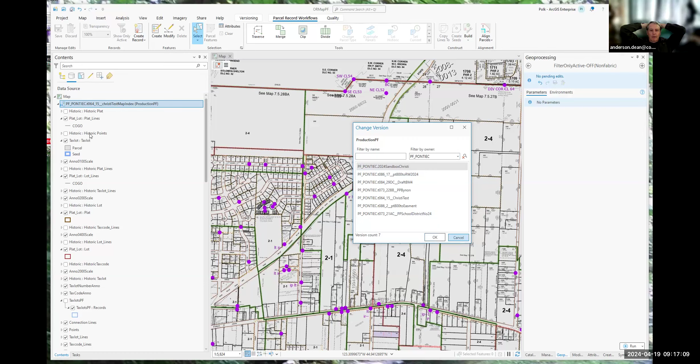So this is tracking, and the information we generate as part of this goes into a voucher process. We have a process that produces files that get directly imported in, and we like to tie everything together.

Would it be showing here where the ID number... no, it's probably the RA transaction ID. Oh that's right, everything's so new. We have this column here that's called RA transaction ID.

And we actually do, in our process of building our initial record, put in our transaction ID from our A&T system to help make that connection if we want to in the future. That's the primary key, I guess.

So do we do anything like that, Gabe, at this point? No, we don't. The deed number would be the closest thing we have to something like that. We do not have transaction IDs in Orion to tie in this way. We store the deed number in source.

So could that be an account number field, I wonder? No, the problem with account number is over the years you're going to do a lot with that account. So if you're trying to track back what that particular version is, you need to track it back to the source.

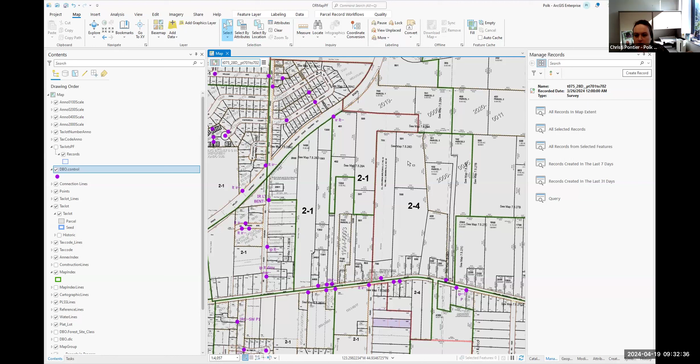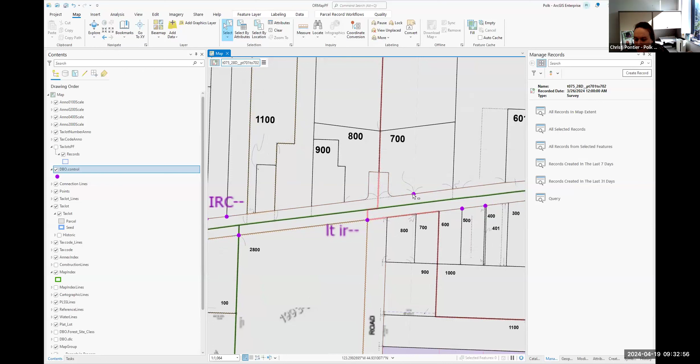Generally at this point we go straight into the traverse and start doing it. This particular one, my call to my place of beginning has a call from a DLC up here down to this point, which we also have control for. So we wouldn't normally in Polk County start with the ground to grid correction, but on this one I potentially would, because I have enough data up front.

Would you guys like to see that, or would you rather skip that step? I would like to see it. We would like to see it. Okay, Gabe wants to see everything. Yeah, I do. I like to see it, whether or not I'd ever use it.

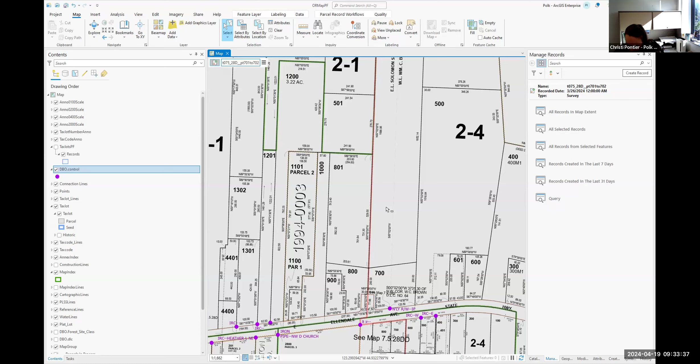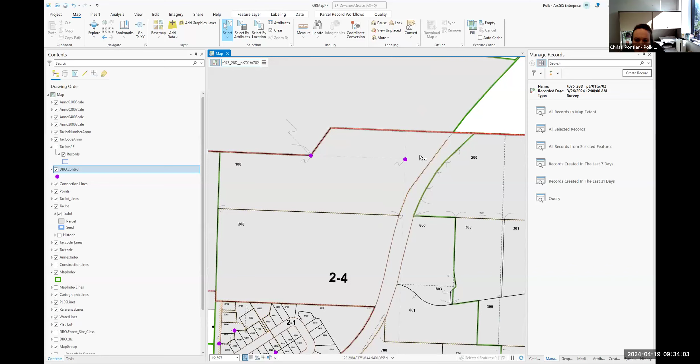So let me go ahead, I need to remember which piece it is. If I have multiple control, I want to make sure I grab the right one. Just give me a minute as I figure out if I need my Shelton or my Brown DLC.

But all of this, all the things she's going to do with Traverse and so forth, are just standard ArcPro tools. However, because she has the record activated, the line features she's going to add from now on with Traverse and the like are all going to be associated with this record. So Traverse is the same, taxlot lines is the same. All that Parcel Fabric is adding is that connection of what you're entering to the record.

That's it. One thing I'll add is in Polk County, this is a choice we made: we wanted our non-fabric feature classes to also track with the record. So one of the things I'm going to do is select my record and run a tool Dean's made called assign record ID on, which allows that whatever non-fabric layers I create will also get the record ID tied to it, so for our purposes it's all connected.

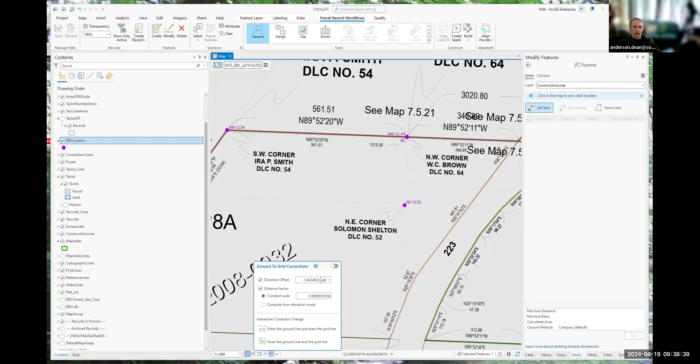I've always had it here by default, so I do think it's always default there. It's always there. Whoops, and I've lost it again. There we go, I'm going to have to re-enter it. It's okay, it's still there.

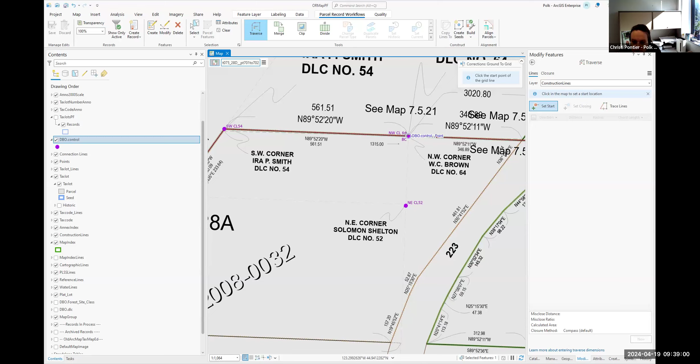So now I'm going to go ahead and hit next. It says click the start point of the grid line. My start point is actually going to be this right here. Don't mind me, we have multiple layers of control—I'm just going to click the one that I want it to be, which is that one. And then I'm going to go down to my other point.

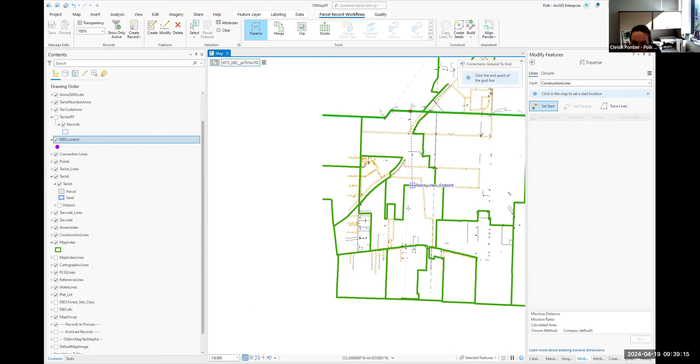I can never do this part right. Cool, good job Christy.

You can set your snapping to those controls. Before, I changed my snapping so that it will only do control and taxlot line, just to help avoid some extra things that may or may not go. So I'm going to go ahead and click this one.

And when I do that... how do I get it to pop up there, Dean? Do you remember? I don't remember. Okay, normally I can also see it up above, but this now shows my direction offset and my distance and my scaling that is set because of how I put those in.

So now when I COGO it, it should be all lined up without having to rotate later. And you typically do this with every transaction, every record. In Polk County, we rarely do it because I only feel comfortable doing it if I have the control to base it off of.

If you want it to just match with your map, yes, it's a great way to go. But that's per record is what I'm trying to get at. You can leave it turned on, but you probably want to reset it per record because every record usually has a slightly different rotation and scaling.

And just an FYI, I just checked our ORMAP, and yeah, when you click on parcel record workflows, that ground to grid tool is there.

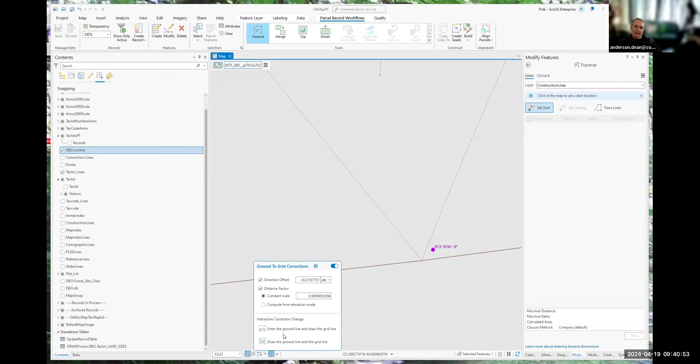Gabe, in the olden days, back in the ArcInfo days, Tom and I decided that we would have a ground to grid conversion in ArcInfo for every township. So no matter where you started, if it was a particular tile, basically a township map, it would automatically set the ground to grid. We did that for a good 10 plus years. Over time, the next cartographer said no, that's implying things that are not clear, and so we took it off.

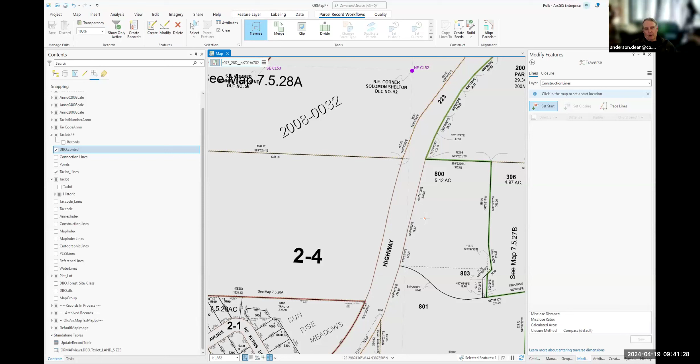Okay. So it's kind of fun to see that it's back, but actually into something that can be worked with. We just flat out set it.

And so at this point, basically my place of beginning, I know exactly where it's at. My call, I don't necessarily need it, but I can go ahead and build it. Like I say, you can build it into connection lines and then it's already part of your fabric. Again, it's just our choice of workflow - we're still using construction lines.

So then I'm just re-entering that stuff just to kind of show that it should match now that I did that ground to grid. If I had not done it, there would have been a rotation when I did this.

And if they had found their place of beginning, Christy, and were comfortable with that, they wouldn't have to do any of this. It could all just depend on your business process.

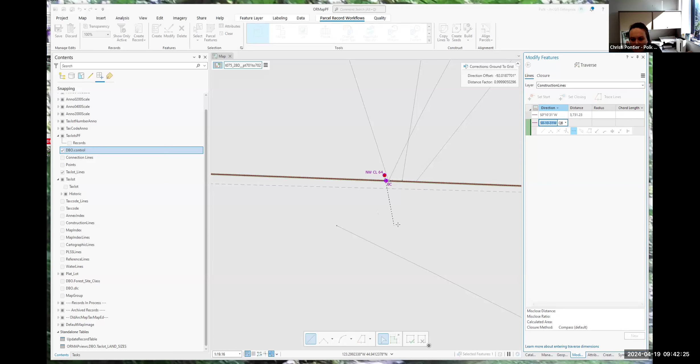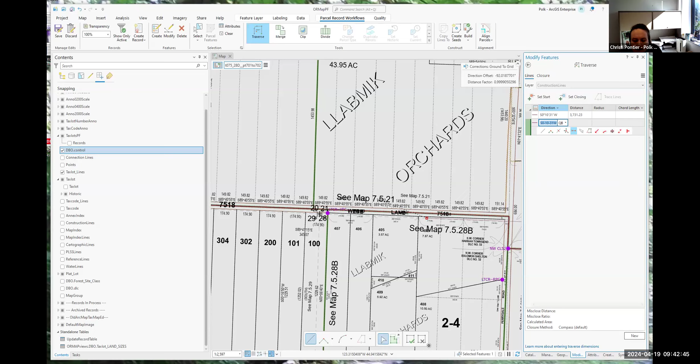And it's a little slow sometimes. Hopefully eventually get there. There we go. Did I type something in wrong? I can't even tell you what happened there - even what map I ended up on.

This is a standard ORMAP tool that you guys have. Yeah.

So somehow it must have clicked off. I'm not sure what happened, but we will reset our starting point.

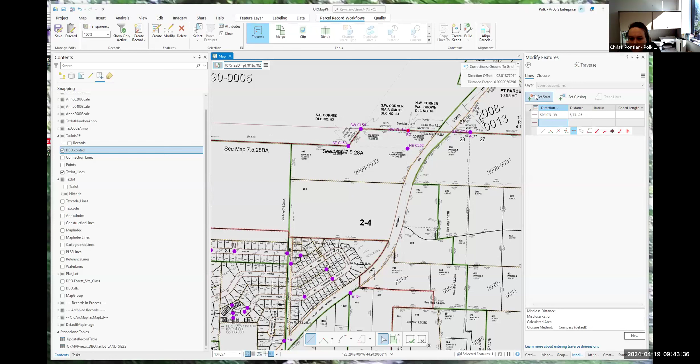Christy, all those purple points are control points. Is that correct? GPS control? Yeah, they're GPS control.

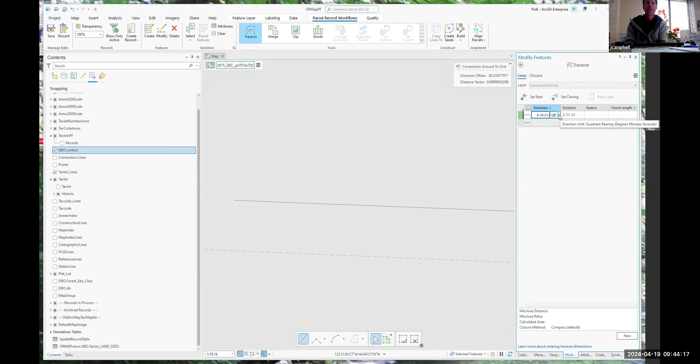Because yeah, I'm jealous, I don't have a fraction of that to work with. We don't everywhere. When I worked in GIS, that was part of my job, was to gather control to do the control mapping. Right, yeah, that sure would make things nice, having to go hunting it down and looking for things in order to tie into. You could do an ORMAP grant and you too could do what Christy did, which was get a GPS device and a shovel and go out and look for them.

I would love it, get outside a little bit. Yeah, I thought that was Chris's. Isn't that what Chris and Jason, what's his name, Jess do over in survey? Peter does our control right now.

Oh, our survey - actually, as part of our remapping, had ORMAP pay for a lot of that work. I'd love to get out of the office some more. It's great when it's nice out.

I'm not quite sure, but for some reason this number looks very off. I think somehow I got my ground to grid stuff off. And Christy, you could just turn that off and jump to Traverse. I think we got the idea.

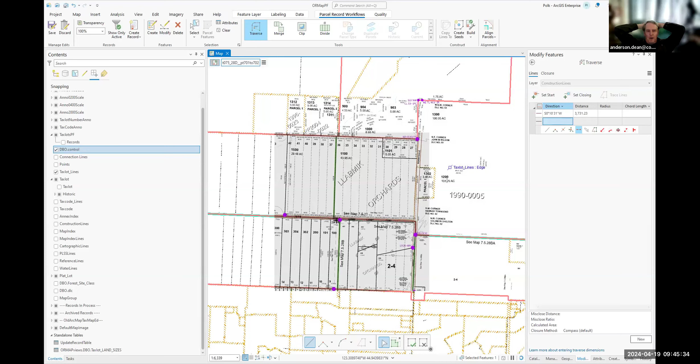Let's see here. Yeah, I'll go ahead and just turn it off so we won't see the rotation happen - we'll have to rotate later ourselves. I'm not sure why it had issues, why it was going so crazy - somehow the grid got way off, was sending you off to Never Never Land.

So as you can see, since I don't have ground to grid, it's not going to match up. It's going to rotate quite a ways off. I'm not sure I'm even going to go ahead and build this line, because in this case, I'd rather just start at my place of beginning.

But I could go ahead and finish by hitting this, or new, or even back, and it would create it. Instead, I think I'm just going to delete this. Don't worry about it.

Doing basic editing, but can you not just, when it's highlighted like that, just turn on edit vertices and fix it that way? Or is that not working, what you guys do?

We may do that when the line is finished. At that point it's going, but we probably wouldn't do it during the middle of a traverse.

And I do use that in the future, when we still prefer to do our editing with the lines instead of the polygons. So I do use edit vertices and insert, or intersect, and a lot of those tools at that stage.

So instead, I'm going to say this is my place of beginning, which I need to make sure I got the control. Now, are you in construction lines, Christy? I am still in construction lines. I will want to change this to our tax lot lines.

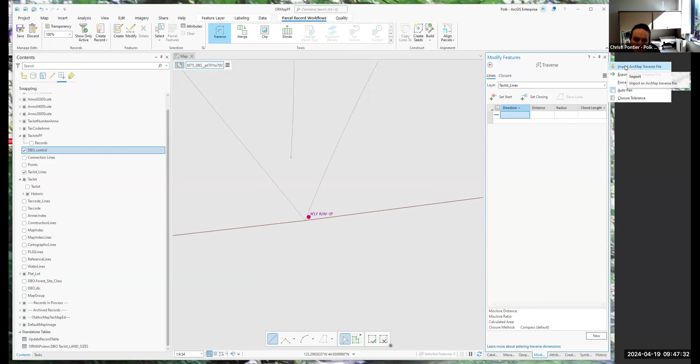And to save time, unless you really want to see me battle with the traverse, because I do tend to make a lot more mistakes on presentations than on my own, I saved an export of the traverse, so I can go ahead and import the file. Go ahead and do that.

So yeah, if you get stopped in the middle, or if you have one that for some reason isn't clean and you think, I'm going to take a 10 minute break and come back to it, you can save it and come back to it. Just like in ArcMap, or if you have ones from ArcMap, you can pull them in.

Oh, that's interesting. Yeah, so here's my traverse stuff. So you can see I have a curve here.

Curves, we put in the bearing. The chord length is our choice. If you do arc length, that's here, that's a choice, and you can set these up by default. And there's the radius. If it would have been a left instead of a right turn, you would have done a negative 15 instead of a positive 15.

But that way, and again, since I don't have the ground to grid, you can see the rotation is off. But it does show, if it's over a 1 to 100,000 ratio, it'll just show high accuracy. It shows the misclosed distance.

You can sometimes see a little more accuracy if you go over to the closure tab. You also can change it from compass to other types from here. And here it will show your residual values, your adjusted, so you can see all those pieces that you kind of saw before in

ArcMap, if you're interested in seeing it. You also can set your tolerance if you want something different for the front. So like right now, ESRI has it set for 1 foot. You can actually play with this and change it if you want.

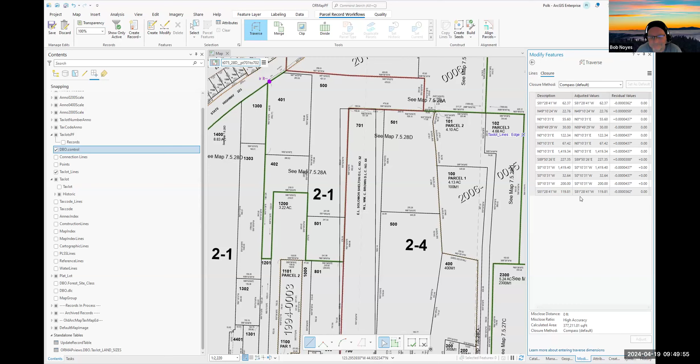We haven't changed our base GIS coordinates and all that. I figure we're waiting for DOR to make that change, correct Dean? Yeah, and we've done that twice now in the last 25 years, going through all the databases everywhere and all the historical data to make sure we don't lose anything. Oh yeah, I'm so glad that the next time they do that, I'll be at the beach.

Yeah, absolutely. Sorry. Christy, did you click on the hamburger before to pop that?

Sorry, oh, to get to closure tolerance, I clicked on the hamburger menu. But if you want to see more detail, you actually click on the closure tab.

And it's also where you go to export or import a traverse file. And if you had a really bad closure but still wanted to force it, this is also where you could say to force the closure.

That's how we do things in Josephine County, just force it. When all else fails, just force it, just hit it harder with a hammer, it'll be fine.

So at this point, I have my perimeter. If we want to make things easier, I know some counties for their initial build used to build off the county and then just place it later. I don't know your guys' way of doing things, but if you want to get rid of some of the busyness, you can hit show only active.

That's going to get rid of all of your fabric features other than what's in your record. We built a special tool since we track the non-fabric stuff to the record, so I can also filter only active for non-fabric and really just clean it up. So all I'm seeing is my stuff, and I can see control because it's not something Dean knew to filter, because he doesn't have it in his map. I added it on my own.

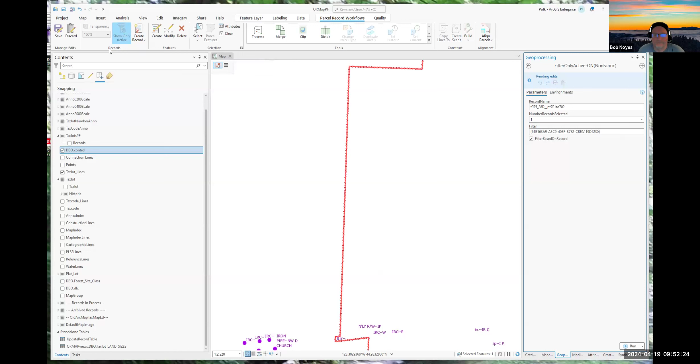Oh yeah, it's on our ORMAP right now, it's grayed out, but I assume once we get Parcel Fabric in there it'll show up. Well, it's grayed out whenever you don't have an active record. If I turn this off, now it's grayed out and you can see everything.

But because I had it on when I changed that, it's still on and it went right back to it. So that COGO was the boundaries based on the bearing and distance of this survey we loaded, correct? Yeah, that's the base. This is the one where I did not have the ground to grid, because for some reason I got that messed up.

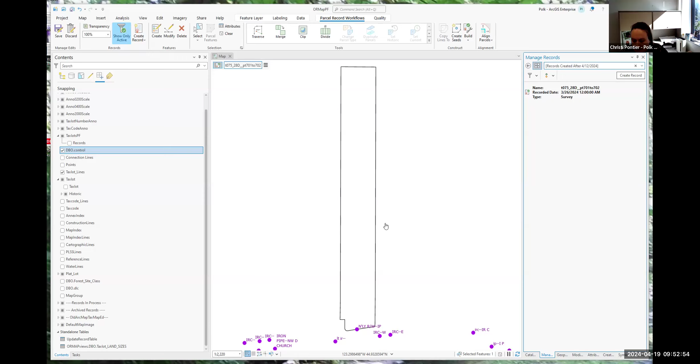Like I say, it's not something we generally use, but it can be a useful tool, and I had it set earlier when I was testing, no problem. I'm not sure what I did wrong, but I don't use it a lot.

So if you didn't use the ground to grid, you would just start from the point of beginning, which you assume is a good point, and COGO from that point. However you guys' workflow works, if you base it off your map and it says start at the northwest corner of that tax lot, great, start there.

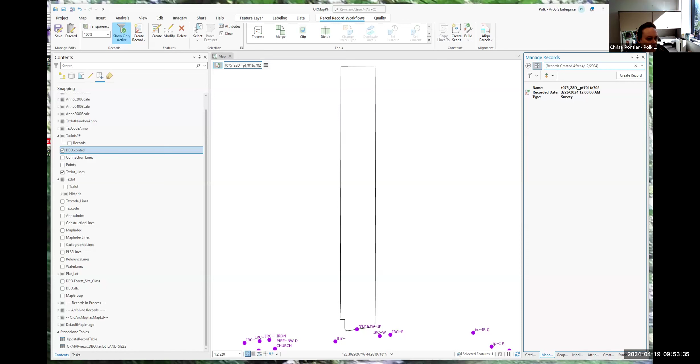Okay, at this point we would then do our interior lines. Assume it's probably similar for you guys too. I'm going to go back to the traverse tool, still set to tax lot lines. I'm going to go ahead and set it.

My start point. I also traditionally used to not worry about when I set a closing point. Now I like to, before I start the traverse, because if things are close, it can actually snap to the end of what you are COGOing instead of what's already been COGOed, where in ArcMap that wasn't true.

So how did you always know where your start and end were? I use snapping. For what though? Like how would you know, based on the tax lot lines, because I had COGOed those earlier, that you did the perimeter. Now I'm working on interior lines.

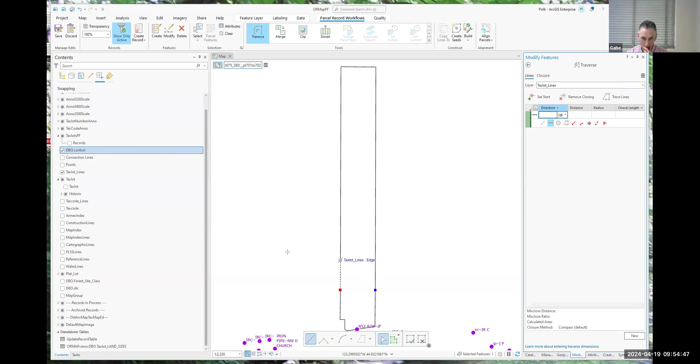So I only have a few places where it breaks, so it's fairly easy to find them, because you don't have the original break, so to speak. I'm following. When she traversed it in, she made individual lines, not COGOing the entire distance. And then her snapping is both to vertices and to endpoints.

And so as you're sliding along, it tells you what it's going to snap to. In an instance this simple, why would you not just draw the line? Why would you traverse it in? Just asking. We always do in Polk County, we try to keep track of everything.

So does that, by doing the COGO, does that put the attributes on the line? The attributes will be, yes.

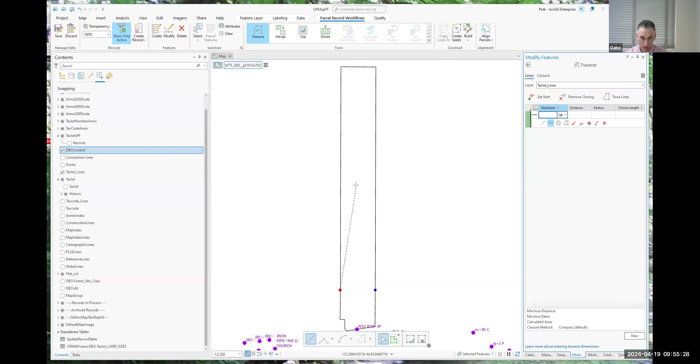So if you just drew it, those attributes wouldn't be on there? Yeah, it wouldn't know unless you entered them in. Okay, so you could draw it and then use the tool to calc, update the COGO attribute.

The problem is when you do it that way, it's going to be its best shot at an inverse, and that may not be there. So it's faster—we've decided it's faster to COGO it in, plus you check and make sure the surveyor is correct, because often they're not.

This way we can make sure—our surveyor often doesn't look at the whole document to make sure it meets spec. But if the bearing and distance on the doc is just slightly off because the folks used AutoCAD and then inversed, and it's not exact, this way we find it.

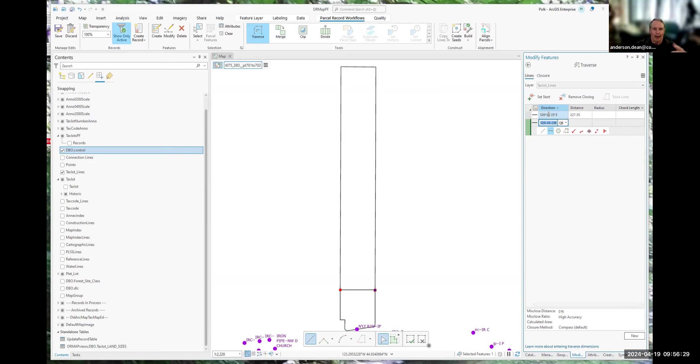Because all you need is that not matching the record when someone's complaining about their taxes, and then you have to explain why it's off, and then they think you're a liar. It's hard to explain when your direction is off by a tiny amount, but if they're angry, this avoids that issue.

We just make sure it matches. But you're right, you can snap point to point, fill it in off the map and quickly double check to make sure it matches. We've just found for us, we're less likely to make mistakes this way and we know better what's going on, which is probably better—but that's why our processes aren't always the best.

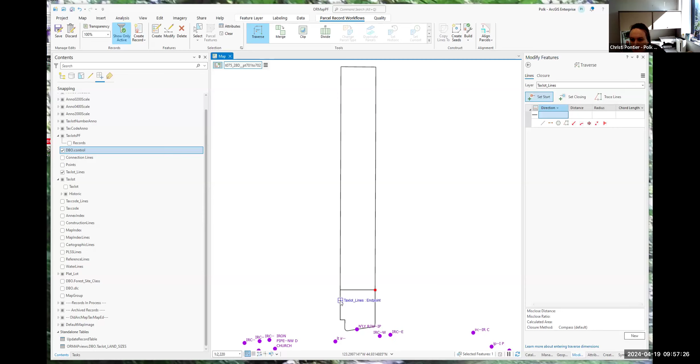Like right here, this one I cogoed in, I could see my closure was pretty good. But if I wanted to, I could set my start point for this one, and then I could set my closing, and I could just decide to draw it in—I think like that.

And it puts it in, and as you can see, it puts the little brackets on it that show this is a computer-calculated amount. But it would allow me to look at it and I could go, oh yeah, that's not right, I want this to be...

229.99, and this one is supposed to be 8128. This one's supposed to be 41 instead of 39. So yeah, I could manually update it like this.

Oh, but that's a great idea, I hadn't thought about that. That's way better than the attribute update—there are different ways that you can do it. And this way I still get to see, okay, I have a 0.01 accuracy on it.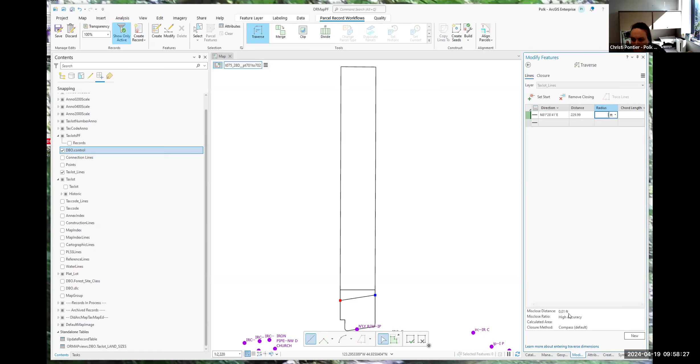But if you had just done the traverse, it would have given you the same thing. Yes, the end result of these two efforts is exactly the same? Yeah, same steps, there's no difference.

So then those are now drawn in, and what we typed in is what's going to get stored on the attribute for that line. So now, since I have my show-only-active turned on, if I open my tax lot lines table...

It's only going to show me the tax lot lines related to this record—that's all that's even here. So it's very quick and easy to see what's actually in for the direction. In this case, the arc length, because that was the curve or the distance, and that's what it records.

And that's because we're still in show-only-active mode—that's why we only see these lines, correct? Yes, if I unclick that, then you get everything, then all of a sudden instead of 14, I have over 2,000. Yeah, okay, gotcha.

I will warn you, if you leave this table open, sometimes you see weird things happen with the map when you're trying to run things. So we generally try not to leave tables open, but they are useful. Let me see.

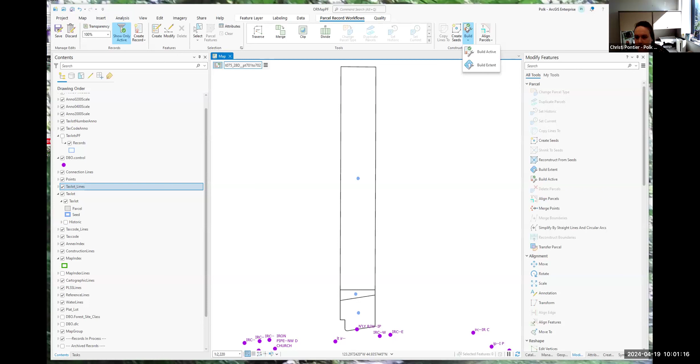It looks like if you're in show only active mode, then you get both. If you don't have show only active, then you get the build extent. You can always choose whichever one. With build extent, you'd have a hard time, I don't think it would really work without turning off show only active, because then all you're seeing is your active.

You would not want to use build extent without this rotated, because then you're going to end up with all these sliver polygons due to the rotation. So just a heads up - depending on which route you pick, there's always things to be aware of.

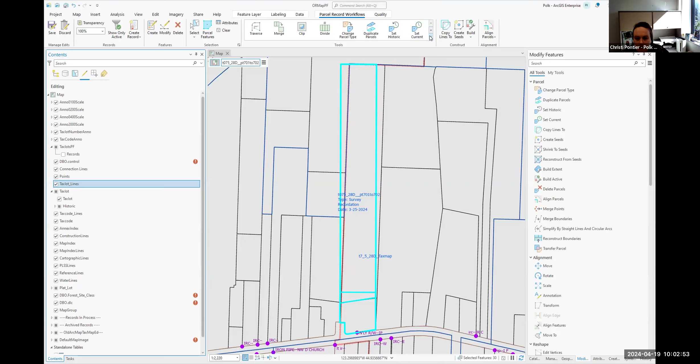The next thing I'm going to do is rotate. So I go to the parcel record workflows.

Where did you click for select all records? In the hamburger menu, right here - select records is here, and further up is select all features in active record. I clicked the 'all' option because I want it all. If there were connection lines created, it gets them - points, lines, polygons - assuming you have all your layers in your map editable, selectable, and on display.

So then, under the parcel record workflows tab, I clicked the rotate tool, and it comes up here - there's other ways to get there as well. I'm going to hold down control so I can move my center of rotation. Right now it says it's snapping to taxlot lines.

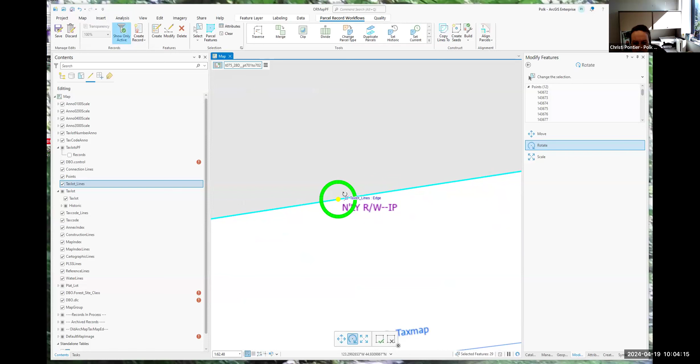I'm hoping to make sure I get it on - it must be on my control, that's why I can't see it. So I made sure I put it on the point I wanted. I'm going to turn the show active back off.

Now I'm going to rotate it to my map. Since I have snapping turned on for taxlot lines, I can just click with the mouse and grab this to rotate and snap to my map.

Like everything else, play with it - make sure you know how things work and what you need on or off. That rotate tool has shortcuts, when it works, because I remember which button to hit. It's amazing, but when you forget which button to use, it's sure annoying.

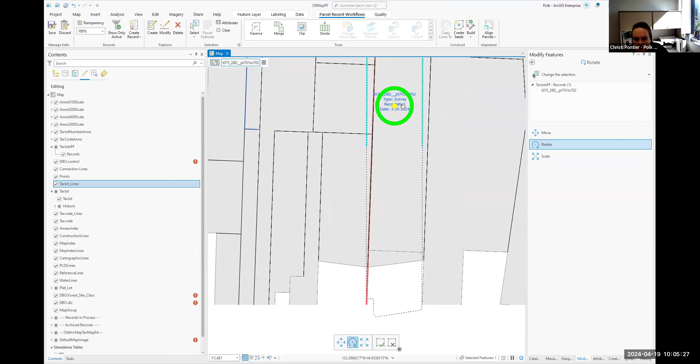So when you feel you have it rotated to the right place, you can just click this finish button and it will move everything. It looks like it did not move my record, which means I probably don't have - yep, I did not make my record editable, so it did not move with it. Now if I clear, select record, rotate, I'll have to move my record separately because I didn't check to make sure it was editable at the time.

So is it going to true north? Why is it going to true north and not your magnetic declination up there in the Portland area? Because we didn't turn on the ground to grid.

Oh okay, yeah, if I had set that up correctly, which was my plan for this, it would have been different. So when the surveyor record or whatever you're using was done to true north, is that essentially what's happening here? Yeah, it had enough information to do the ground to grid. And that doesn't happen very often.

Well, there's a rumor we had a surveyor down here that liked to drink in the morning. So back in the day, back in the old days, I had done a project down in Benton County, and for whatever reason, a surveyor for 40 years always entered the north-south incorrectly, but the east-west was always good. Good historical record because he did a lot of stuff, but you had to be aware.

So where are you at, Christy? One of the things we'll do usually at this point is update our tax lot numbers. There are several ways you can do it. When there's so few, a lot of times I just select them and work through the attribute table in this new attribute pane. If you right click on the main title of the grouping, you can say select only these, and it only selects the tax lots.

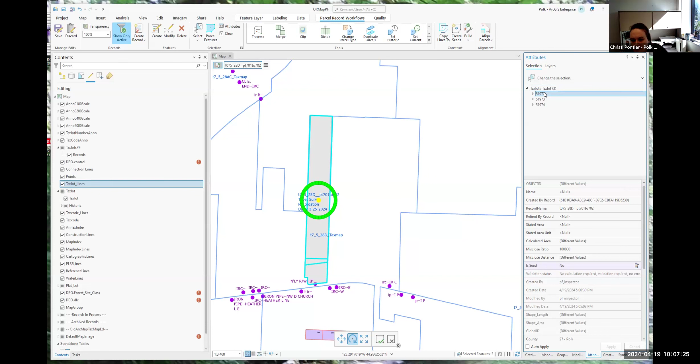Then I can easily just go through and say, okay, select this, and I know that one needs to be 702. We actually use the tax lot field to keep track of this for ORMAP purposes. ESRI usually defaults to name to do this stuff, and I can type things in. The other thing you could do, like on a subdivision, is they have a sequential numbering tool.

If you bring this up, you can choose your layer, in which case right now I'm on tax lot. You can choose your field. I would be filling out tax lot. Find it. Oh, I'm gonna be close. There it is.

Format number. So like if it was a parcel, you could put in parcel space, if that's how you did your lots, things like that. Or if you have a tax lot number that has something like county name first, you could put it in there. Start value, in our case, this would be like 700, increment by 1, and then you could click on the map and do it.

Unfortunately, I have 700, then it's going to be 702, then 701, so I wouldn't use this tool. But if I had, it would go here. I can just double click when I'm done, and it numbers them all. And when it's done running, it usually shows what the next start value would be. In this case, I would expect to see 703 because it's already run the first 3, and then I know I could start again if I wanted to and keep going with that.

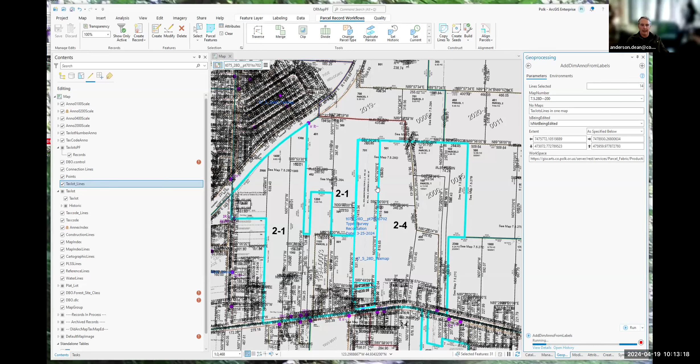It meets your labeling specification, but it may not meet Polk County's labeling specification. So Christy and Zach went through and they created labels with the correct size, the correct spacing, and all that good stuff to annotate. So that may be something we look at a little bit more.

And so if we want to see the ones that were created, I can go ahead and turn show only active back on.

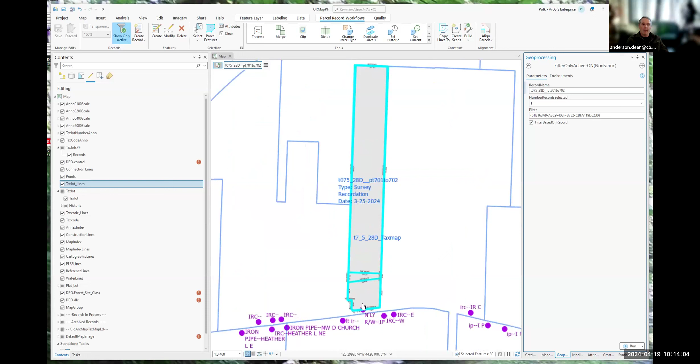Oh, that's nice, yeah. So again, this is that tool that, because she had the tool on that assigned it to the record, it did it. And so that's why you're not seeing the other stuff, but you're seeing this annotation.

It just seems a little cleaner to work with. It has some downsides, but you get yeah.

And so, yeah, so then I have annotation that I can then move and play with. I have different options. There's also a tool.

They also have the add taxlot anno from labels, and I don't know if they have actually have that as an ORMAP tool, but I'm probably not going to use it for something like this anyway.

I find it very useful for subdivisions. For something simple like this, if I turn my filter only active back off, you would see I already have tax lot numbers for 701 and 700 in the map.

A lot of times I prefer to just grab them and assign them to my record instead of creating new and having to delete out the old.

And then I only have to create annotation for 702. There's different ways to do it. But if I go ahead and turn this tool back off, we'll see.

And if you don't assign your non-fabric features to the record, it won't matter anyway, because I already have a 701 here, I already have a 700. So all I need to do is create the 702.

So a lot of times it's just easier to go to the create window. I am in 200 scale. It's fine, number. I have everything turned on. I apologize, I could have turned some of these off.

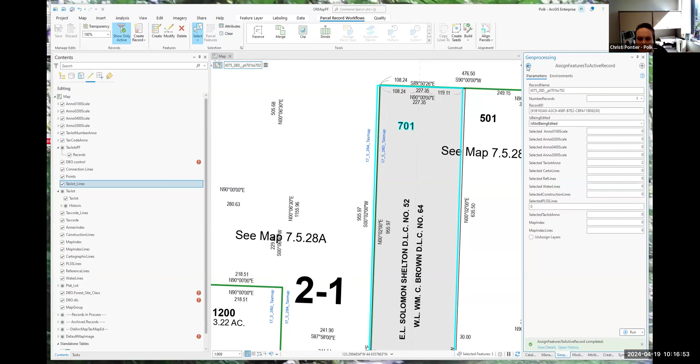Were we seeing right there that the rotation was off? That's the record. When I rotated it to match later, I didn't get it quite on. Yeah, her record is not quite rotated correctly.

Darn, you noticed. Well, yeah, that's because normally in our process, a lot of times after we build the lines, before we create polygons, we will do all our rotations, because that way when we do create, everything will be perfect.

We don't have to worry about if we missed a point or the record wasn't selected. And it rotates each point to where it's supposed to be, typically.

So what we normally do is, after we finish all our traverse so we just have lines, we try to place things the best we could at that point. That way, before we create annotation, polygons, points, or even a geometric piece for the record, it's already rotated.

So Gabe, I have to say one thing I'm annoyed at with how the hamburger works with Parcel Fabric is that you have to always explicitly select the record and explicitly select all features with the record. For the select to work, all of them have to be turned on, selectable, and editable if you're going to move them. Sometimes you forget to have the record done and then it's not in the right place and you have to go fix that. I don't know why when you say select all features it doesn't deal with that better, but I get caught by that.

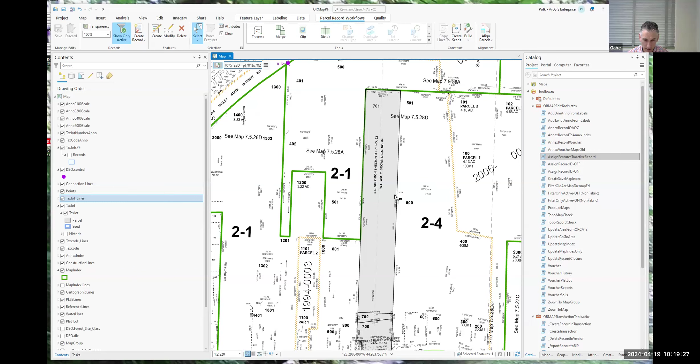Okay, another thing I have a question about is some of this annotation, like we wouldn't put on our map because it's very down, especially down by that curve. Can you select them and just delete them and not have it display, or do you always keep it there? Oh, you can delete them.

It's just annotation. In fact, we usually do like this curve data, we normally don't keep it unless there's plenty of room. So you just go up here and you can hit delete and the annotation's gone.

So the tool is converting the labels, and the request I had from Donna and Christi was to move as much of that information into annotation and then allow folks to move and delete stuff. The tool tries to, and that comes from the label. So you can play with all that up front, decide what labels you want to bring across, and then it moves it in.

Yeah, it's better that way than having to actually type them all in.

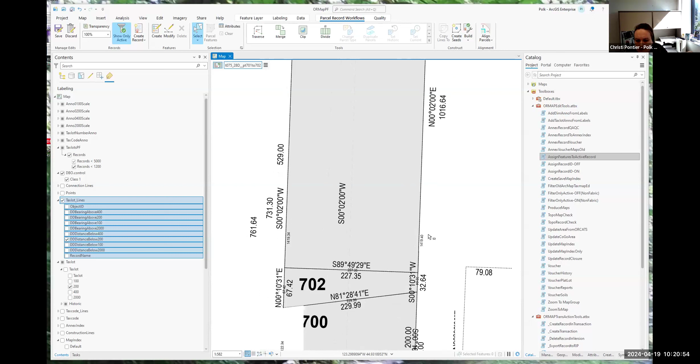Depending on how you have it set up, you can choose — when I have tax lot line labels on, I might only want to show distance for whichever scale you're on. In this case I'm at 200, so if I want distance you can decide above or below, that kind of thing. I could just turn on the 200 distance, it wouldn't even turn on the bearing. You can see there's a distance right there that they put on. It will just create it that way instead of having to create all the pieces.

Like say at Polk County we keep a lot of annotation, that's not common for most counties. The cool stuff is that the tool is just grabbing whatever's in the label for that particular label that you currently have turned on.

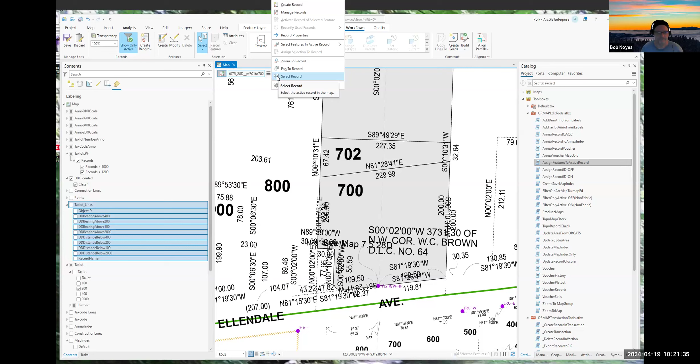Yeah, we can talk about that offline. I hate to say it, but I've got to make like a horse droppings and hit the trail. So, Christi, thanks for showing everybody this, and I'll check in with you guys, Gabe, and see how it all went. Okay, thanks.

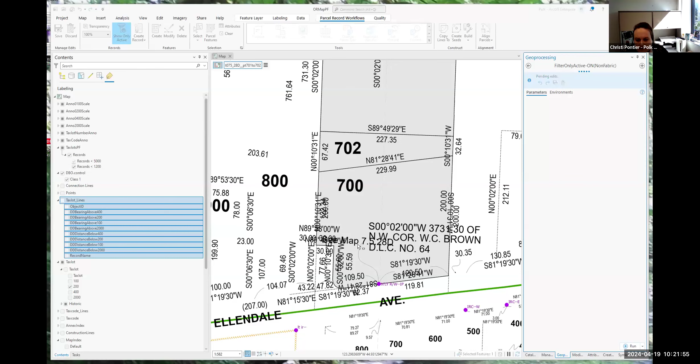So then I'm going to go ahead and kind of clean things up a little bit, work with just my record stuff again. I'll go ahead and get rid of some of this other annotation, because generally we would place things ahead of time like this, and then deal with the stuff that was already on the map. Sometimes I try to pre-look at the map and delete off things before I even create the annotation. It really just depends on what we're doing and what we need.

But it's easy. It's easy to grab and use the move tool and move things as needed.

In this case, where that bearing for some reason got flipped, I can select the one it goes with and steal the angle. And then when I click on it, just replace that. And now it's where I want it to be.

That I was just — cool. Yeah.

And then grab the right piece, move it where I want, continue that way. Like say, you can always delete things if you just want to select — they don't have enough room for this bearing, you decide you can just delete it. So different ways to kind of move around annotation.

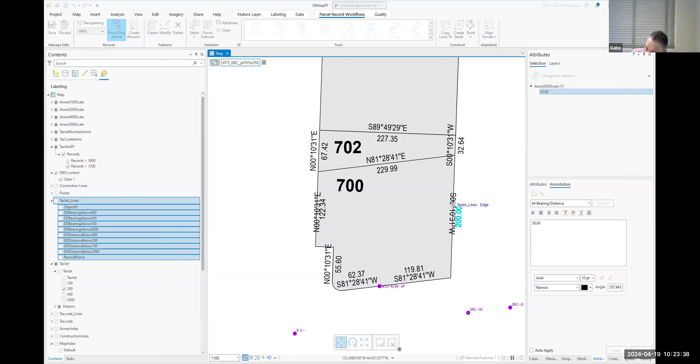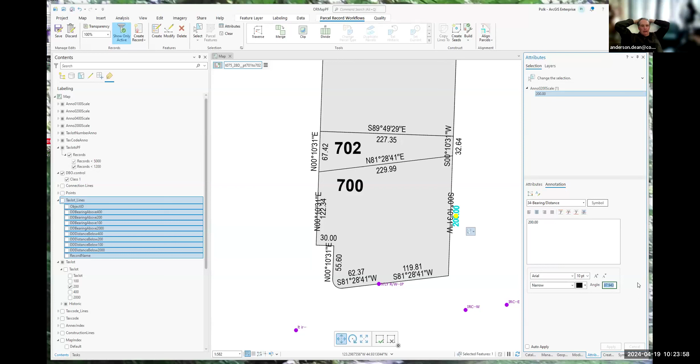I don't know how much time you want me to spend on this, but yeah, there's all of those things. Annotation is a big headache for Jeff and I. Annotation's always been my least favorite, even back in my GIS days. But you're using the annotation attributes as your primary tool for manipulating the characteristics of an annotation.

I just find this is usually the route I go to get to things. There's so many different ways to do things, you just have to find what works best for you. Might have to turn the snapping off. Hold on. But anyway, I don't know how much time you want me to spend on that, but we can manipulate it.

I can interject real quick. The only problem I have with manually moving all this anno is I like to have everything offset evenly. Otherwise, over time, you're going to have all these numbers, bearings, and distances at variable distances from the line. And to me, that kind of potentially could start looking sloppy, but I don't disagree with you.

This has always been Polk County's process. When I was at Marion, that's how we did it too. We did the follow feature and had the set offset, and that's how we worked. Yeah, and I'm all about that. It's hard for me to get away from that tool because I've used it so long and it's so clean. So yeah, I can't deny that.

This is, like I say, Polk County, how we've always done it, for multiple reasons, partly also because we do so much stacking of annotation. When I go and turn this back off and we have that old annotation underneath, we try to keep our historic annotation as much as we can too. So if this used to be 120 instead of 119.81, we'll put parentheses around it and stack it up above it. So everything has always stayed manual here instead of having that uniform feel.

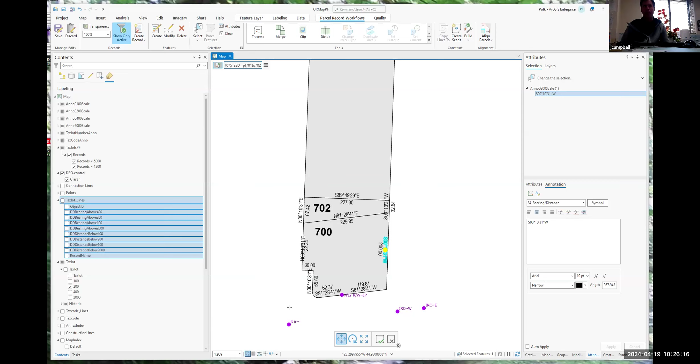We just gotta change our ways, trial by fire. Well, or find things that do work. There's a lot of things that I've had to find new ways to do what I used to do, and it just comes with lots of time and playing.

I feel like one of the best examples of that is how we actually put this record into our map. Which, let me just scan, make sure I'm not missing anything. So while she's doing that, I will see the Marion County guys next week, and I can talk to them about potentially doing an annotation demo and recording it.

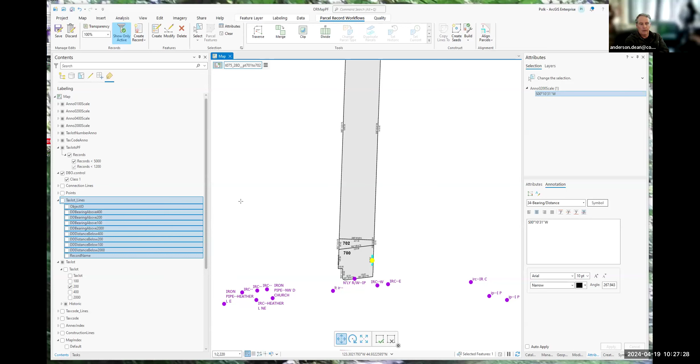So let's keep pursuing that. Christi, if that's what the guys at Marion do, let's see how they do it, because they're using Pro also. And do you know, I assume they're also in the Fabric, probably. I will find all that out next week. Tom Rohlfing, the assessor, and one of the guys is going to be up at the GIS forum presenting, so we'll find out how far they really are.

Switch back over. And I know they also have a more normal amount of annotation. They just keep distances, they don't worry about the bearing, a lot more of that too. So it's probably a lot more similar to what you're used to seeing.

And I also know that Marion County, at least when I was there, was very polygon based for their editing. Here, like I say, we're very line based. And so how we generally will work things in the map is more line based than polygon based. And that was my plan of what to show you as far as working it in, which would be the next thing I would probably focus on. If you guys are ready for that, or if you have more questions, or if you want to see more annotation, we can play with it, but it's more of the same.

Yeah, we are line based too, I think. We create our polygons out of lines, and the annotation thing as a whole, this was good introduction for us for this piece, I think. And there are tools for making arrows and everything too, can look at those if you want, just let me know. But I wanted to make sure to show you what I've found as far as trying to get back to more of a line base build in Fabric.

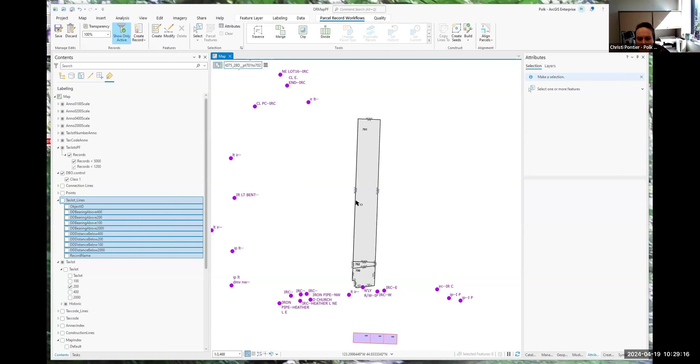So one of the things when I get to this step, I do it because I find issues with having the old lines and the new lines and the old polygons and the new polygons. As long as you're in at least 3.1, Dean, when they did reconstruct from seeds, you're able to take... I'm going to just select all the polygons.

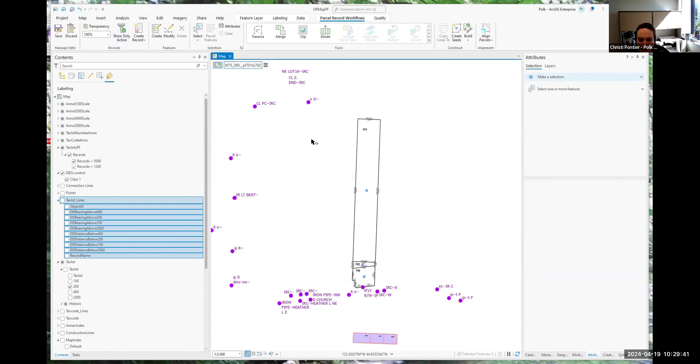Make sure that's what I have selected. I'm going to run what's called shrink to seeds on my new, so this is because I still have show only active, my new tax lots, I'm shrinking back to seeds. I'm now going to go back to show all of the tax lots.

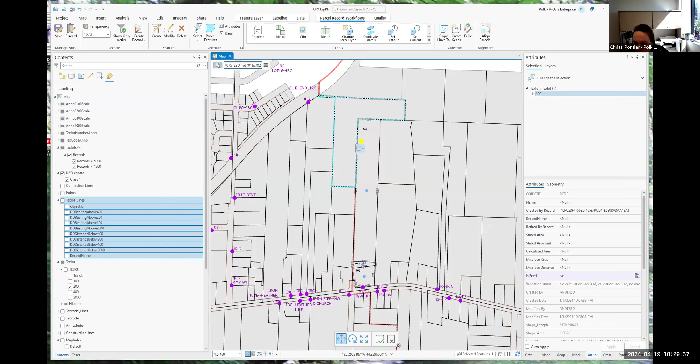My next step would be to select all the adjacent tax lots. So I'm holding shift to select a whole bunch. I still have the move tool on, apologies for that, let's turn that off. Back to just select. So I'm going to hold my shift key and select all the adjacent tax lots.

I'm going to go ahead and also shrink those to seed. But this is a really cool way to do it. So I'm just teasing Christi. And the order matters on this.

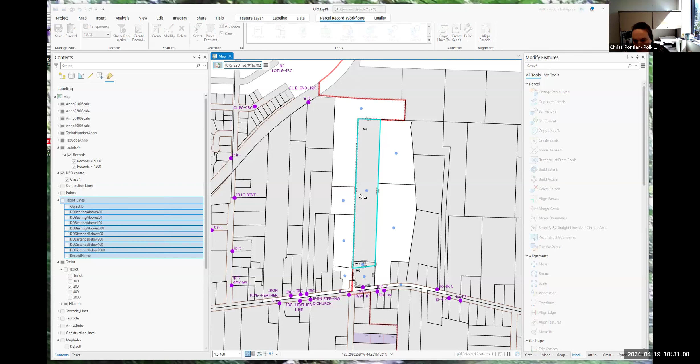Because now I still have my original 2 tax lots. So like if I select this one, you'll see it covers 702 and 701. My original 2 tax lots are still here. I'm going to select them after everything else is already shrunk to seed. That's important to stipulate that part of it.

So if I select them and then I click this set historic, when I do this, because all these others are at seeds, it automatically is going to take all these lines that were related to the old tax lots and make those tax lot lines historic as well. So now when I try to select a line right here, I go to my attributes, I only have 1 tax lot line selected instead of 2 because the old one is now already created at historic. So I don't have to worry about that cleanup.

Sorry, so you selected all the new tax lots and then set to historic, is that right? I selected all the old tax lots. Well, there's kind of 3 steps, and you could kind of choose your order, but I usually am in show only active. So I go ahead and select my new record tax lots first to shrink to seeds. And after I've done them, then I do all the adjacent ones and shrink them to seeds.

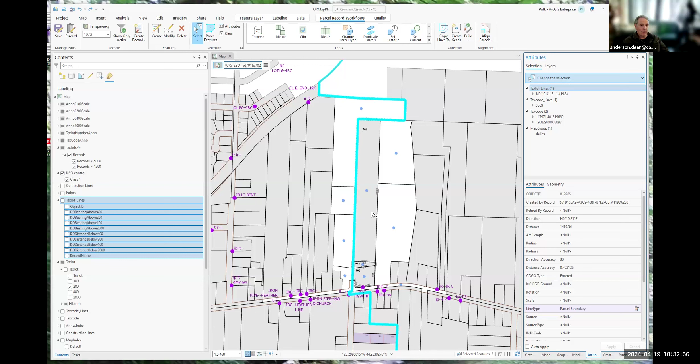And it's important that all of those are shrunk to seeds before selecting your old tax lots and setting them to historic. So her third step was to select the 2 old tax lots and assign them historic. Because now they're, you don't see them, they're still there, but they're in the historic pile. And you have a record that they used to exist in this location, but because you set it historic and your tax lots are tied to those polygons, all of that information got slid aside and you no longer have to mess with it.

So right now I just undid that last step. So my old tax lots are still regular current polygons right now. If I select this, we can see underneath it's the old one. We can see the attributes over here. It's an older thing.

And if I went ahead and selected this way, we're also going to see right now there are 2 tax lot lines because there's the one I created and the one that was there already. So then if I clear this and I just select those polygons, so those are now selected, and then I set them historic. Now they took all those tax lot lines associated with them because they weren't shared by these anymore, because they've already been shrunk to seeds and made them historic. So I only have my new tax lot lines for my boundary.

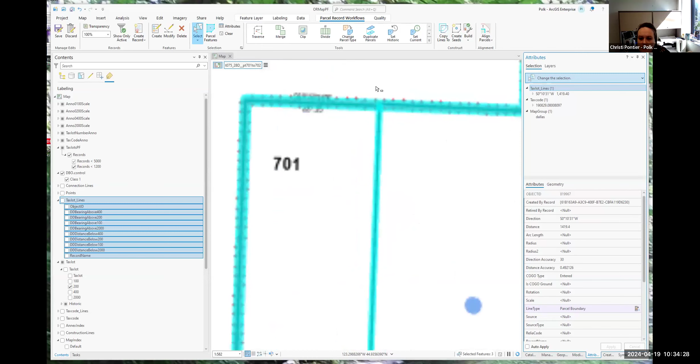So now I need to do my line cleanup. Obviously, depending, you make your different choices to keep it simple. I'm just going to make things match my new. And so up here, you can see it's kind of off. We're going to do that whole, select the line and edit vertices. I'm going to probably turn off some different selection just to make life a little easier right now.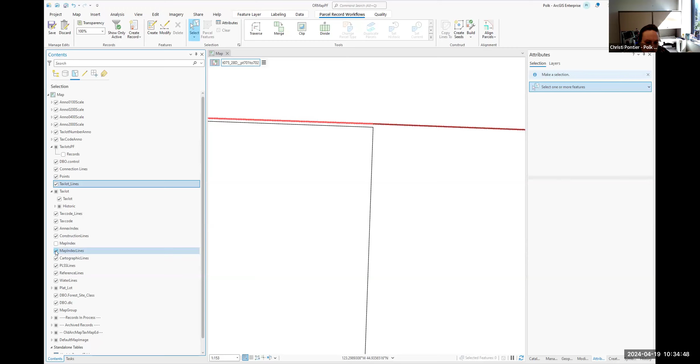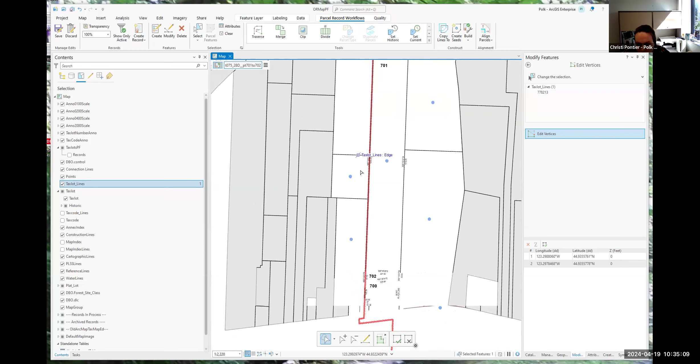Okay, so now I've selected my tax lot line. I'm going to hit edit vertices, and that way I can just snap this to here. Normally we'd spend a lot of time making sure that's how we wanted to do things. Those are going to be intersects, so I'm just going to leave them till later.

This one here. So you could use the Esri tools for adjust and all that to do this. Correct, but she is just making sure that she has it exactly how she wants it.

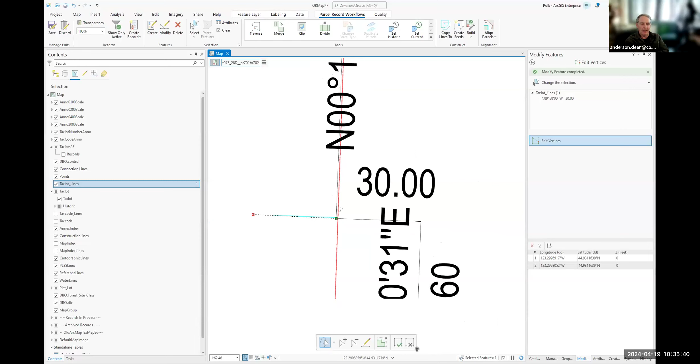And again, this is fitting with our standard workflow that we've done for many years in Polk County. Yeah, thank you, Christi. Because it all just depends. All counties are different based off of their needs, their time constraints, everything else.

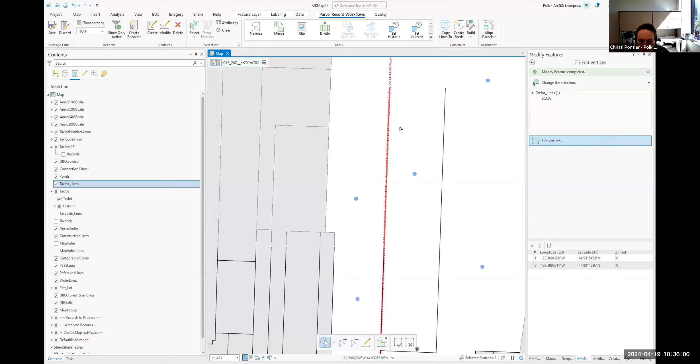So on these ones, they're going to actually be intersects, and so I'm going to use the intersect tool. That's also in the parcel workflows, and find the line intersection tool. It's fairly similar to ArcMap.

I will grab my one tax lot line, I will grab my other tax lot line. It shows them in gray. And then when I zoom in for my last one, it shows this dashed because it has to extend, I believe. And then we click there.

It should happen. And what now happened to the COGO attributes? I did not hit the recalculate, so in this case they should still be how they were. It looks like it adjusted the length of this line, but it still kept my bearing. Okay, so it calculated the break.

Yeah, good. And then again, this is a Polk County thing. When I clear this, this line is now red. For us, what we do is make sure we have things, the line types calculated to parcel boundary or road. If it's not calculated, we make it big and ugly. So what I'll show you is after I'm done, I'll take care of those line types.

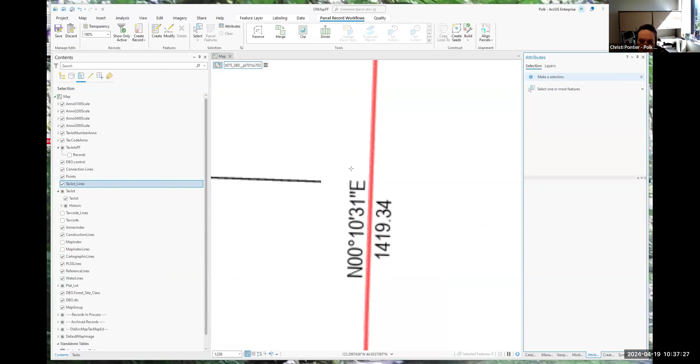So then we'll obviously need to do this one. This one is an extend. So this was the deal that in the domain we said go to default if you duplicate the line. So that's why it's doing it.

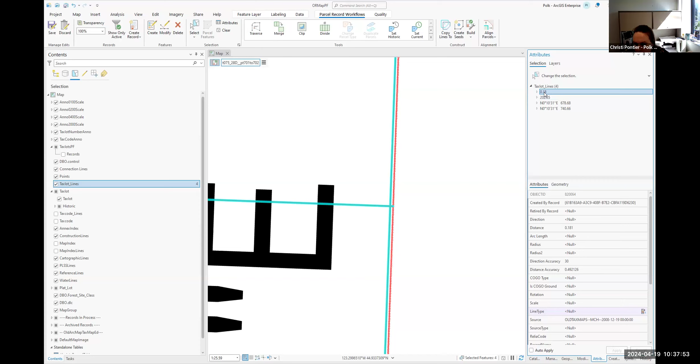And what I'm going to do is just go ahead and select this right here from the attribute table right now, because I know I'm going to want to delete it. And I'm just going to delete it, and I'll quickly take care of just that little piece. And then I believe this is my last one I need to do.

There's no topology anymore to check if we missed one, right? How do we? Topology still exists in ArcPro the way it did in ArcMap. But not in Fabric? It's... yeah, it's still there, and it works the same way it did in ArcMap.

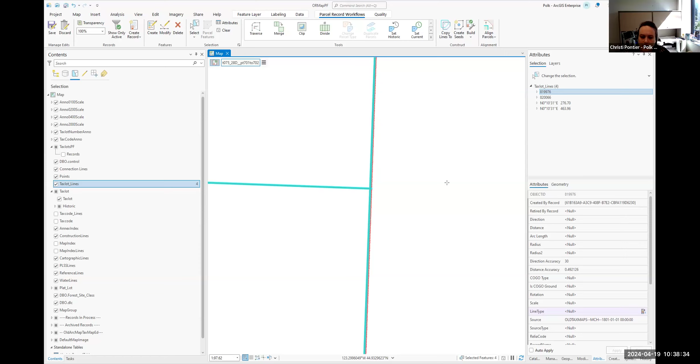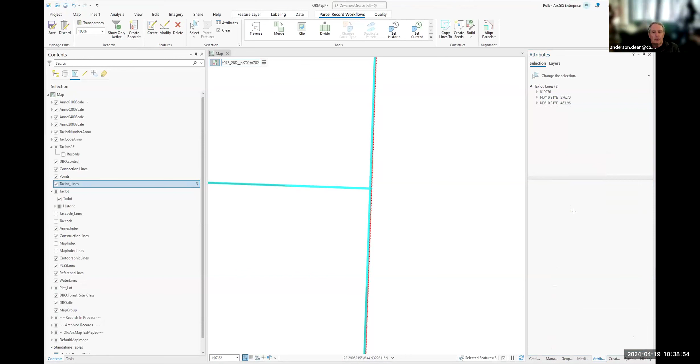Because we are so infinitely concerned about lines, we have created a separate topology tool so that you can select all of the line, select a map extent, and it actually copies that data set out to another data set, runs topology, and then lets you look at it. The idea was that you can have some very tiny errors that running topology can cause.

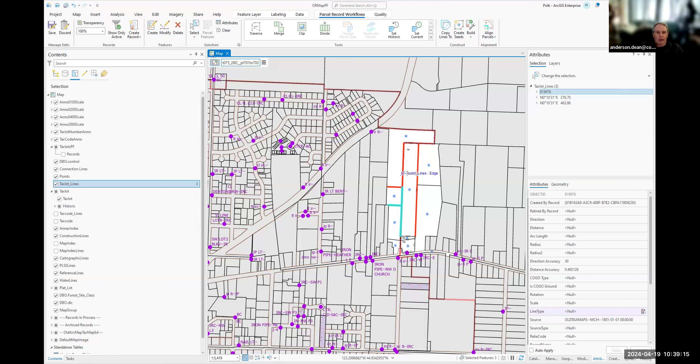And I think Frank talked about that in the class. So we actually don't apply topology here, but in our QA/QC we check for it. And that's another non-ORMAP tool that we could talk about.

So I think I've done them all. Next thing I would do just to clean it up is I want to get rid of all those ugly red lines. I usually just quickly select this way because I know all of my tax lot lines, even if they were already calculated, are all going to want the line type of parcel boundary.

Because I have them all selected as a group and I have this selected here, I'm looking at everything as a group. As you can see right here, it says the line types are different values—some of them know where they belong, some don't. If I hit the dropdown and click parcel boundary and apply, now all of them are set to parcel boundary, so I don't have to go through and do a field calc or do them separately. They now all look clean.

And those were red because they didn't know which one they're supposed to be. Yeah, we have things symbolized, so the line type was set to null, so it was this ugly red line.

When you play with a line, mess with it in the domain, if you've duplicated or split the line, you can have it set to default, and our default is unassigned. That way we always know that line has been messed with. It does add another small step, but it's part of the workflow. It's a good visual.

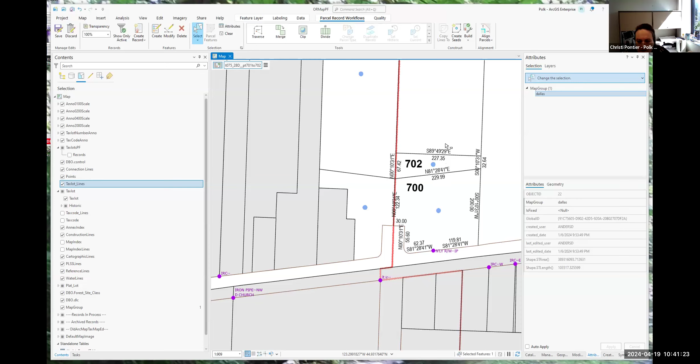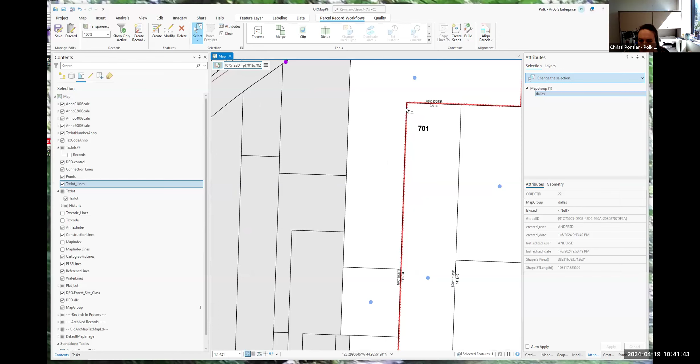Now, because the one line is a tax code line, you would probably have to go check that and make sure you snap the tax code line to your line vertices. Didn't know if you guys wanted to waste the time. Same thing with the map - if I turn my map on, I also have a map line here, so I'm going to have to fix all that because they are off at this point. As you can see, the tax code is going to need to be fixed there.

But at this point, since I believe I got all my lines cleaned up correctly, I'm now ready to build my polygons and see if things work correctly. One thing that's important to remember when doing this, you have to be zoomed out far enough that your entire missing polygon shows, because when we go to reconstruct, if something's off screen, the polygon won't build from seed. So that's it - those got there because we did the shrink to seed, right?

Correct, these are all of our shrink to seeds. Okay, so now I make sure that, yep, all my roads are showing all the way, my tax lots are showing all the way, and I'm going to make sure I use reconstruct from seed, not build.

And the thing to be careful with this tool is when you do reconstruct from seed, it doesn't necessarily know what lines it's supposed to go to. So if you have duplicate lines, or anything extra in there, it's not going to build the way you expect. This works specifically because we focus on a line-based build and only have one line, no duplicate lines.

So I'm going to go ahead and hit reconstruct from seeds. I'm going to hope that all of my polygons come back, and they did. And if they didn't, you could just hit the left arrow and undo that and find your errors - or if it built part of them, I don't have to undo. I know exactly which area to target to look for where my line errors are, and then I can fix them and hit reconstruct from seeds again.

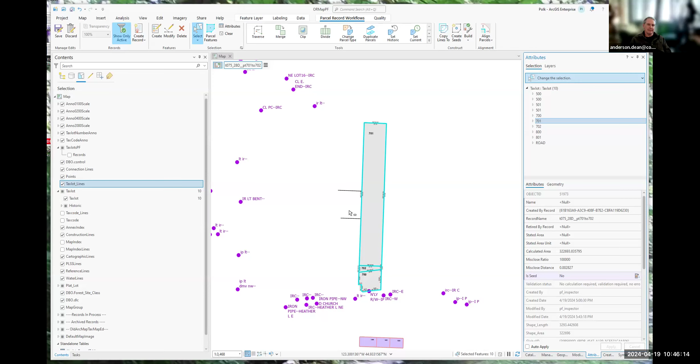Which makes sense. What I'm getting at here is we spent a long time figuring out the business rules to make sure it worked to meet our needs. It may not be yours - this is after hours and hours of trial and error on a lot of things among multiple people, because it seemed to fit best for how our processes work.

So let me ask you this question. I appreciate all the time you spent with us, but on a normal process, how long would it take you to do this survey? What would the time expected for you to complete it be? It's hard because our process ends up being so broken up.

Usually we don't work it into the map. At this point, I would then run topology, which would produce a map. All that good stuff.

There's a lot of pieces that we do extra that others won't do, because of all of our old processes that we have built in to help keep track of records, which now ESRI has a way to do for us if we want.

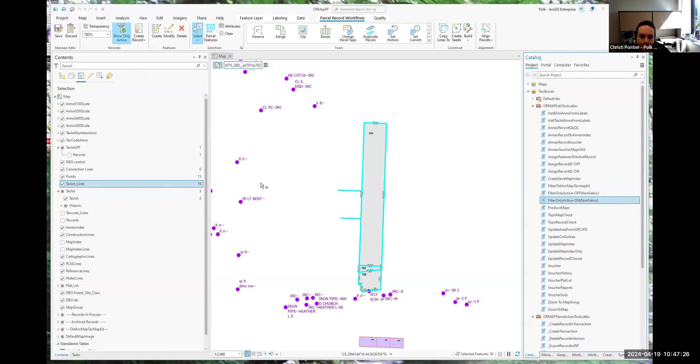We would then, we have our own version of the topology tool, and we run that. Once everything is clean, you'd go back to your source, click on your version, and then go to the versioning tab. We would reconcile at this point.

You could have made your map before this part, right? Yes, you can.

At that point I'd then post and it would go back into default. There are different ways to set that up - you can even set it up so I think your version gets deleted upon posting.